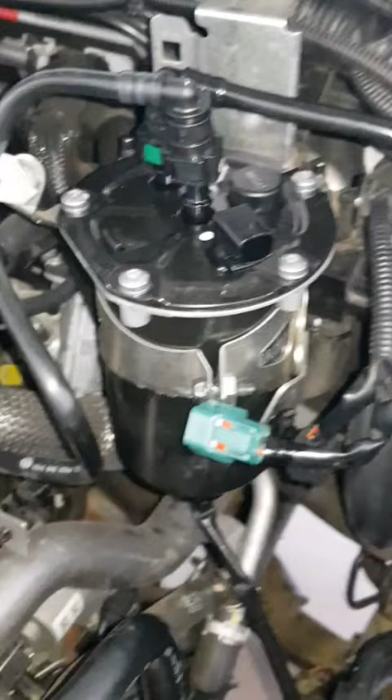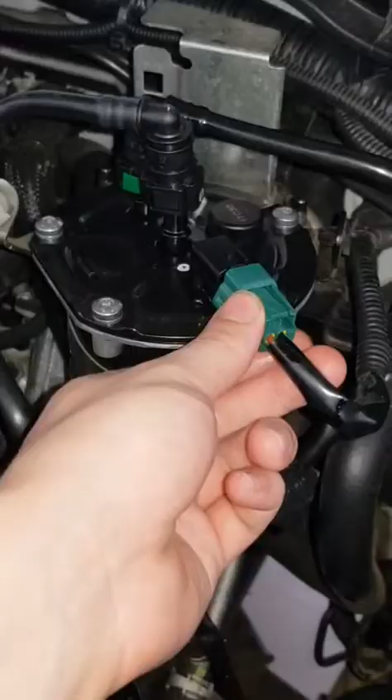Essentially, the first thing you're going to want to do is take off your electrical cables. That one's just to push down with your thumb and then pull off. These two up here, you push in these little buttons, you can see the buttons, push in the buttons on both sides and pull up, obviously on both of those.

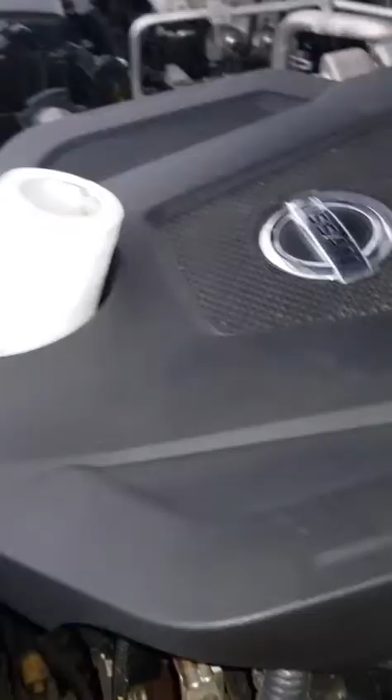Now when you do that, fuel is going to come out of these lines. There's a little bit in there, there's not a huge amount, you're looking at about that, but what I did was I actually put this container and just sat it in there, and then after I pulled both of those out, I just drained them in there for about a minute or so before I wiped them with a bit of paper and then just left them up there before I took the rest of the filter out.

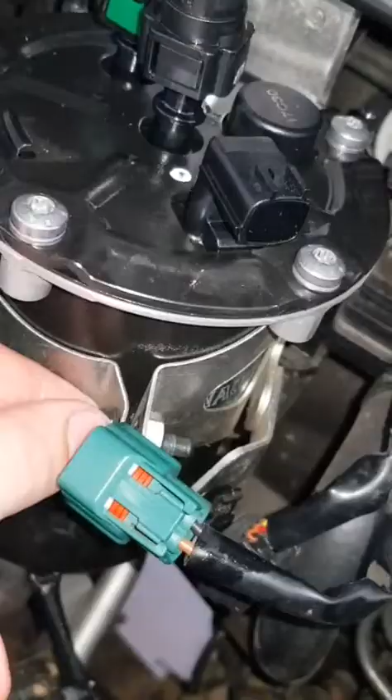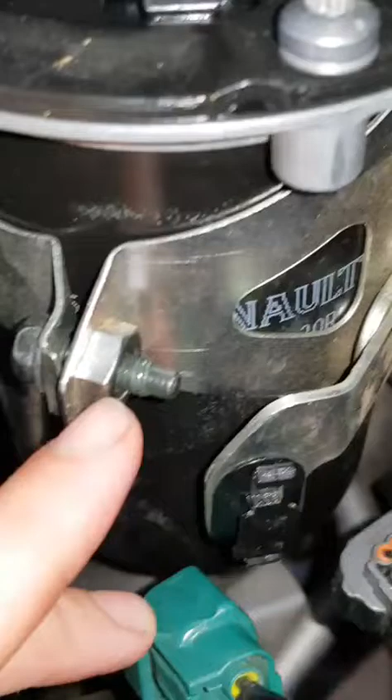Now, just make sure that when you're doing this, because this is the last step to take this off, when you start, this is a 10mm, start twisting that one off with your socket or however you're going to take it off. Just be aware that this 13mm bolt is actually welded to the housing, so don't put resistance on that thinking that you need to twist this. This is a part of the housing. Do not touch this bolt.

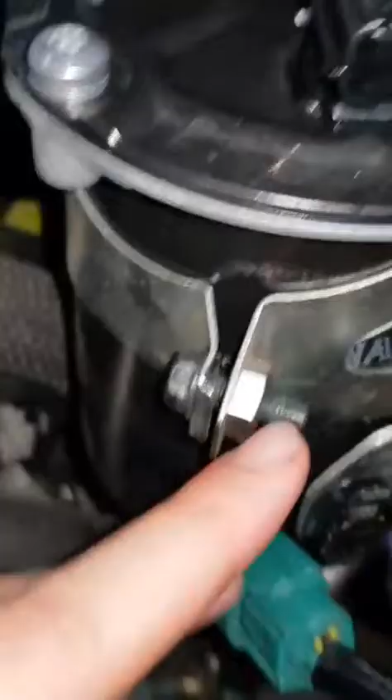All you need to do is get a spanner or socket on this one here. This is a 10mm, and it'll come off super easy just like that. Don't touch that bolt.

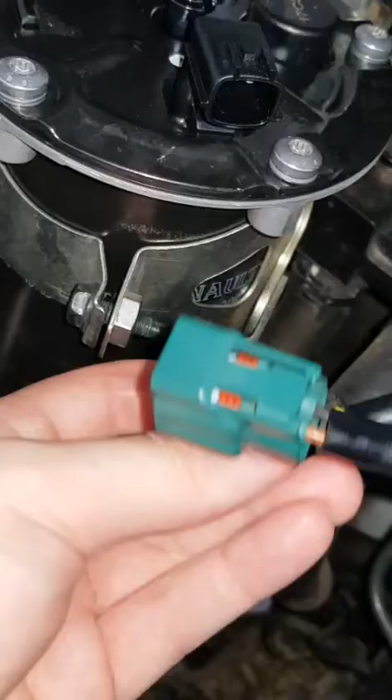The next thing you'll obviously do is disconnect this one. Now this particular cable was a bit of a pain to get off. You can see how it sits on the edge there like that. Do not rip out this fir tree clip holding it back in at the back. What you want to do, because that's sitting on there like this, is you want to put your thumb, oh sorry, I've got it around the wrong way. You want to put your thumb at the top of it and push it down and then pull up.

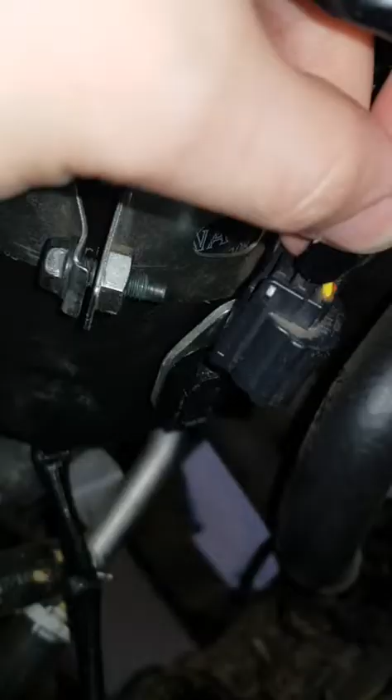So if it's sitting on there like that, thumb at the top, which is a bit annoying to get to because there's this little metal bracket here. So thumb at the top, push button down, and then that'll pop up and off. It is a pain. I ended up using a flathead screwdriver to actually push that button down to slide this off of that little bracket there.

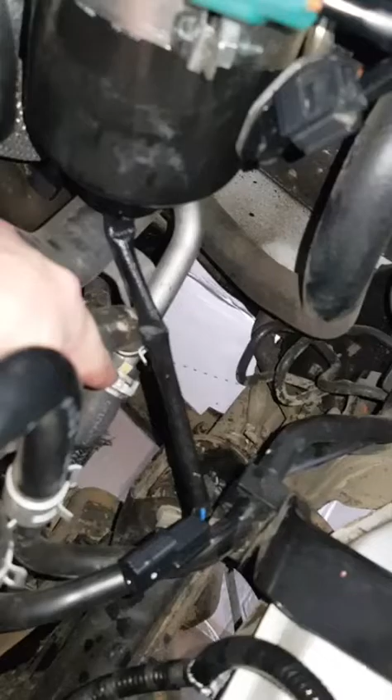So once you've taken all that off, this unit will come straight out. Now obviously it's full of fuel. Do not disconnect this down here. Fuel is just going to piss everywhere. So once you've successfully removed the unit, you then want to take it straight over to a bucket, and then it's just hand tight, that last little drain at the bottom, and that's about the amount of fuel that's going to come out of there. So you'll empty that into a bucket, not all over your engine bay.

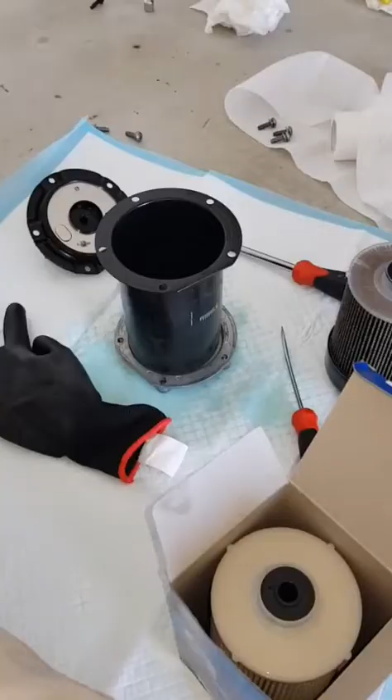So I understand that this isn't ideal, but this should give you a pretty good idea as to how the actual filter comes apart. So you can see the metal bracket that's below it here. Now this was situated in the filter like this, obviously being the fuel filter itself. This is down really, really deep in the actual filter.

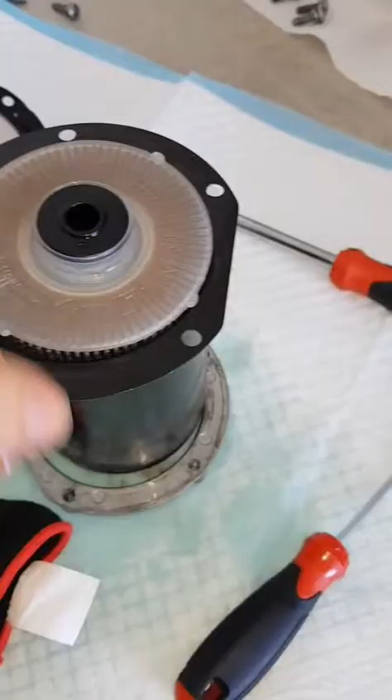Now to get it out, I just used a bent flathead and basically pried it on the edges and used these little tabs to slowly lever it up. And then eventually it obviously popped out. And it's pretty straightforward once you've got that far. It's just obviously putting in your new filter and putting it all back together.

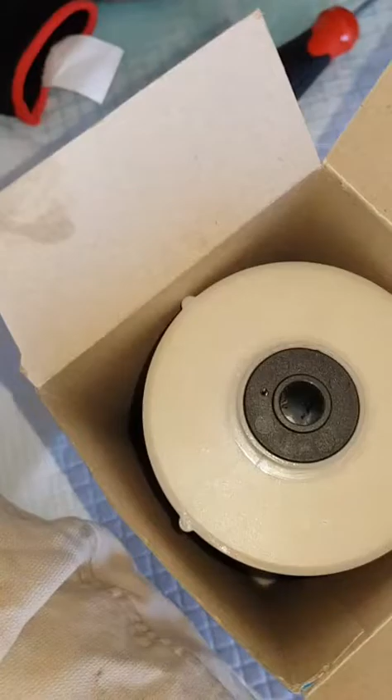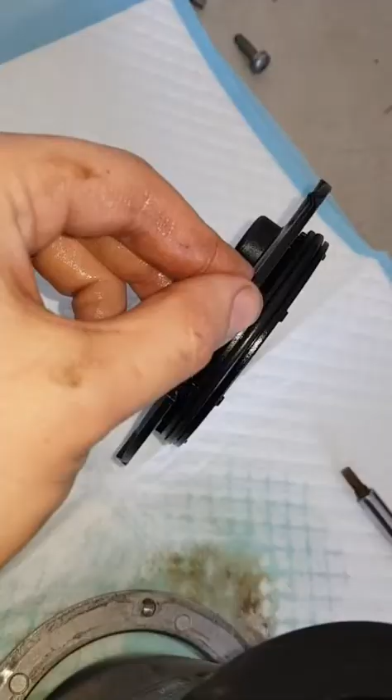In your new fuel filter pack, you should have received some O-rings. One O-ring is obviously for this actual lid. You can see the O-ring there, so I'll be replacing that. And then the other O-ring is over there, as you can see, for the bottom cable connector. It'll be that black one there just above the red O-ring. So yeah, now I'm going to put all this back together and throw it back in, and then we'll have to prime the fuel pump after that, so I'll walk you through that.

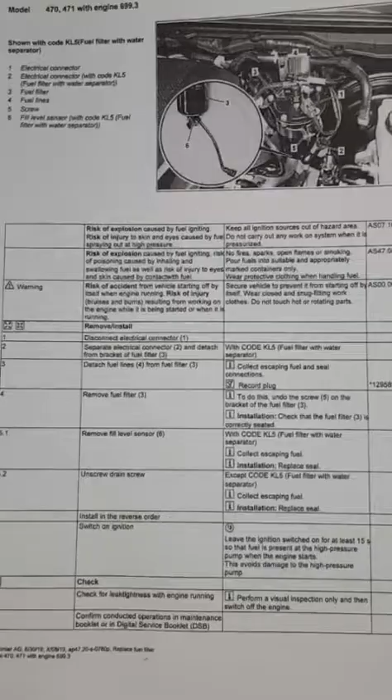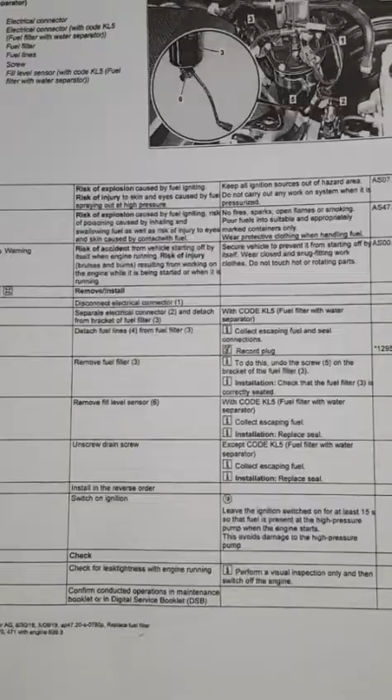Now guys, this is the actual work instructions for removing the fuel filter on the Mercedes X-Class, which is slightly different to what I've done today, but this is the important bit that you need to be aware of, and that is, now that we've actually got our fuel filter replaced and it's all installed, make sure that these fuel lines are clipped. You'll hear a clip. You'll push them both down and they'll clip. Do not get that line confused with where this line's supposed to be. Green at the back, black at the front.

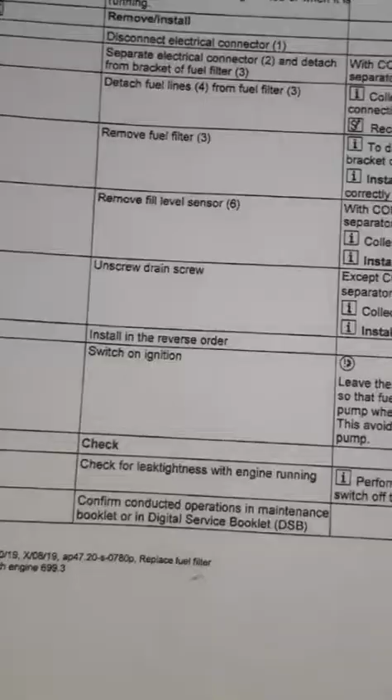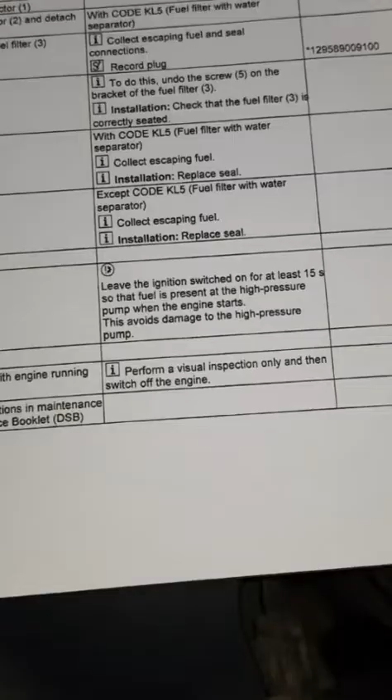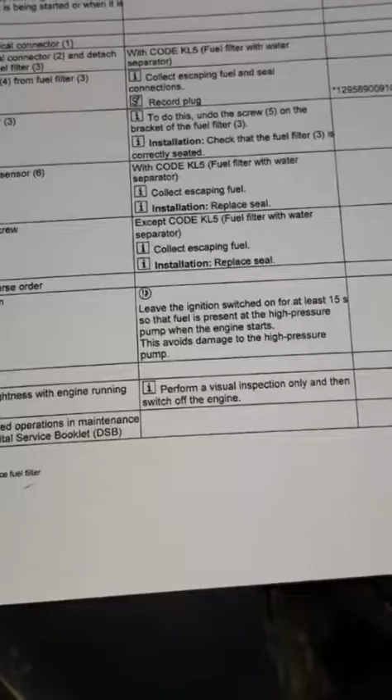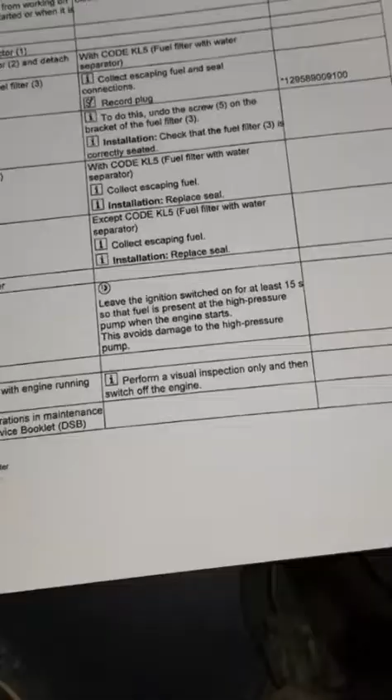Now, once we hit the ignition, do not turn the car on. You just want the ignition on. You need to leave the ignition switched on for at least 15 seconds so that the fuel is present at the high pressure pump when the engine starts, to avoid damaging the high pressure pump. Do not turn the car on straight away. Hit on, let it prime for at least 15 seconds, leave it for 30, go and have a Coke. Come back, then turn the car on. You have to give time for the fuel pump to prime to put pressure back into these lines, or you could do some serious damage.

Now I'm going to walk you all through this one more time to make sure that you get it right. You see how it's got on, so you want to go ACC, that's one click, and then on is click number 2. That's it. You now leave this for at least 15 seconds for the fuel pump through the lines, after which you should be fine to flick the car on. Alright, it's been about 2 minutes. I'm going to flick the car on, making sure obviously the handbrake's on and it's in park. So far so good.

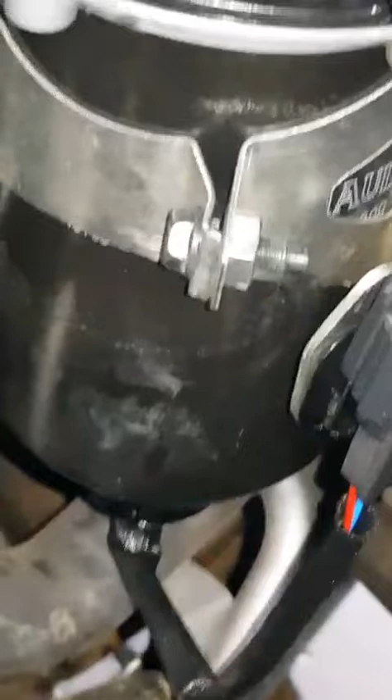Now you're checking for fuel leaks. You want to look at the bottom, make sure that's on nice and tight. Not too tight obviously when you're doing it up, because it is just plastic. That little metal bit is there to make sure that you don't crush the fuel filter when you're tightening it up. So you want it tight, but don't over tighten. Check your hoses for leaks.

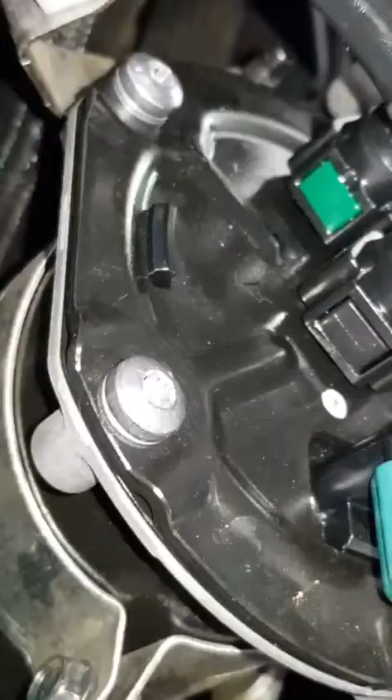They can't go down any more than they already are. I'm only pushing down just to double check. But that all looks pretty good. We'll take it for a spin. We'll check it when we get out to make sure that there isn't fuel everywhere. And then that's pretty much it.